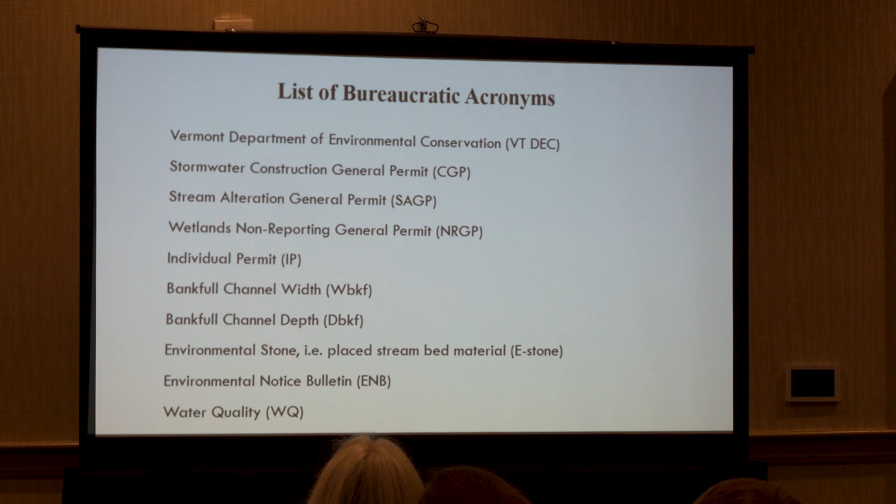Acronyms, gotta have them, okay? A couple of these, they'll be in the slides. I don't always point them out. So there they are: Vermont DEC, Construction General Permit, Stream Alteration, SAGP, that's a lot. Comes up a lot. Wetlands Non-Reporting General Permit. IP is gonna come up, Individual Permit. And a lot of you know Bankfull Channel Width, Bankfull Channel Depth.

E-Stone, Environmental Stone. And I have to say, I worked for the state for 12 years, and probably 6 years into being a river management engineer, I finally was told that the E of E-Stone was environmental stone. I didn't know that, so just want to point that out. ENB, Environmental Notice Bulletin, and then WQ, Water Quality.

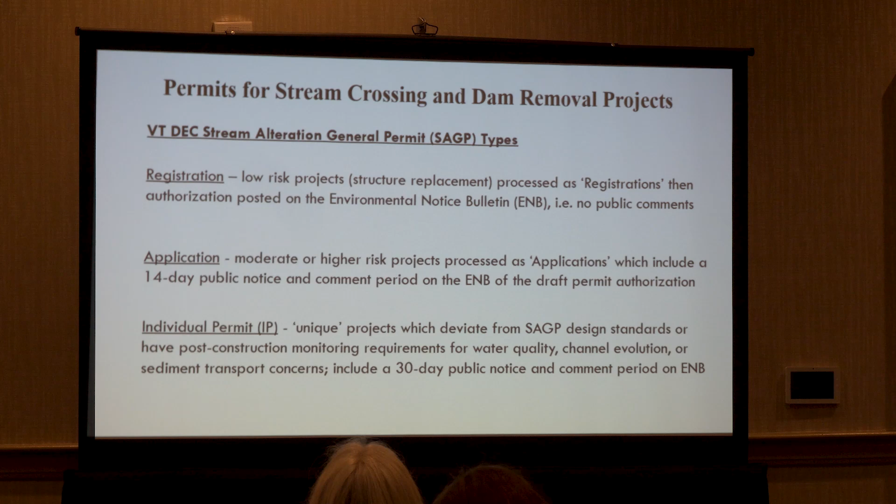So, stream alteration permitting. Couple of different pathways for your projects, depending on the complexity. So you have stream crossings, and you have dam removal projects. Most stream crossings are going to be a registration, which is basically a low-risk project that meets the standards, gets posted to the Environmental Notice Bulletin, and there's no public comment, right? It's something that we do on a regular basis. There's really not a high risk to it.

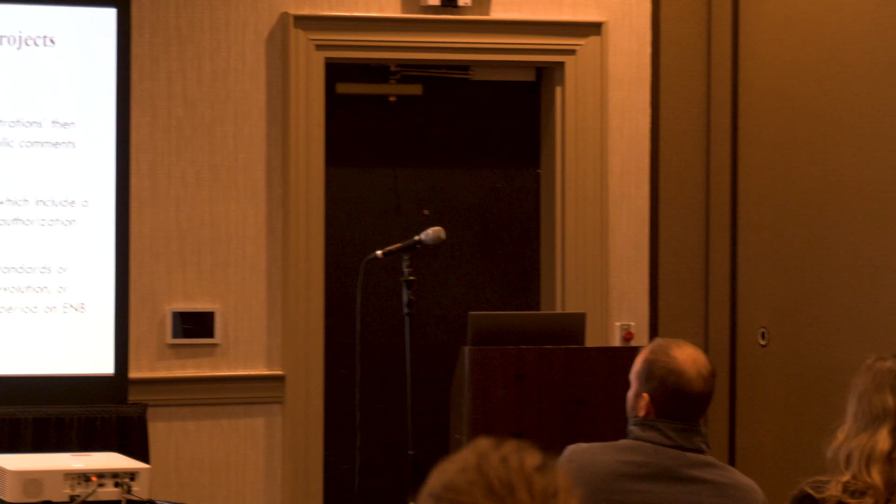Most dam removal projects are going to be in the second category, the application. So what that does is basically puts it on public notice, because we're often dealing with multiple landowners and larger amounts of disturbance compared to like a culvert replacement project. So that goes to the Environmental Notice Bulletin as a draft permit. You get 14-day public notice period. We rarely get public comments on stream alteration permits. If we do, we need to address them.

And then the last one, which is very unique projects, or projects where there is post-construction monitoring requirements related to water quality, sediment transport concerns, or channel evolution issues. That's an individual permit process. I do not like individual permits. It basically takes what I would normally give out, which is a 1-page authorization for a project, and has a lot of legal language. It's basically like a 5-page permit that we issue, and it's got all of these references. It's a pain in the butt. But we actually do it every once in a while, and that has a 30-day public notice period.

So water quality monitoring for stream alteration projects. These are standard conditions in the stream alteration general permit. So basically, you need to minimize turbidity and have minimal discharge of sediment during construction. And you need to isolate your work area, have appropriate sediment controls to the maximum extent practicable, okay?

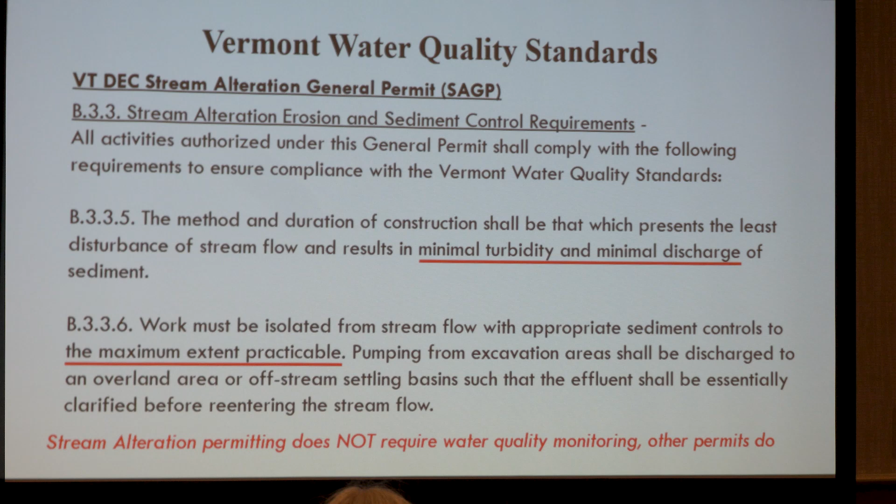Sorry, other permits might. If you have a stormwater permit for your area of disturbance, then you have to do monitoring during and after rainfall events. So a couple of other standard conditions. Just mentioned it, you gotta comply with your stormwater permit.

Common sense stuff. Your equipment can't be leaking fluid. You can't have hydraulic fluid dripping off. You can't have fuel dripping. If you're dealing with concrete, and this is more for culvert replacement projects where you're doing like concrete head walls, or concrete wing walls, or putting together precast concrete structures, you can't have that uncured concrete get discharged to the water course. Common sense stuff.

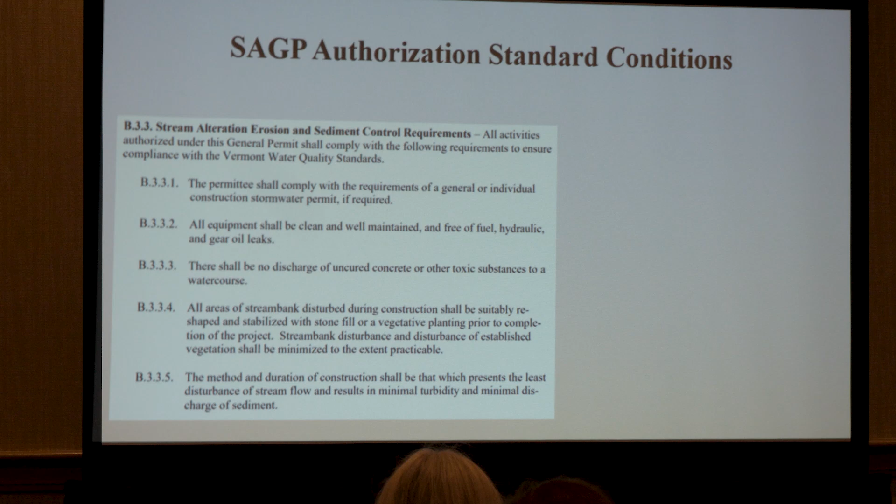So things to focus on is that all the stream alteration activities require submitting a water control plan. How is the contractor going to deal with stream flows? And this is actually a more recent update to the stream alteration permit. Prior to 2022, that wasn't in the actual permit. So we've changed that recently.

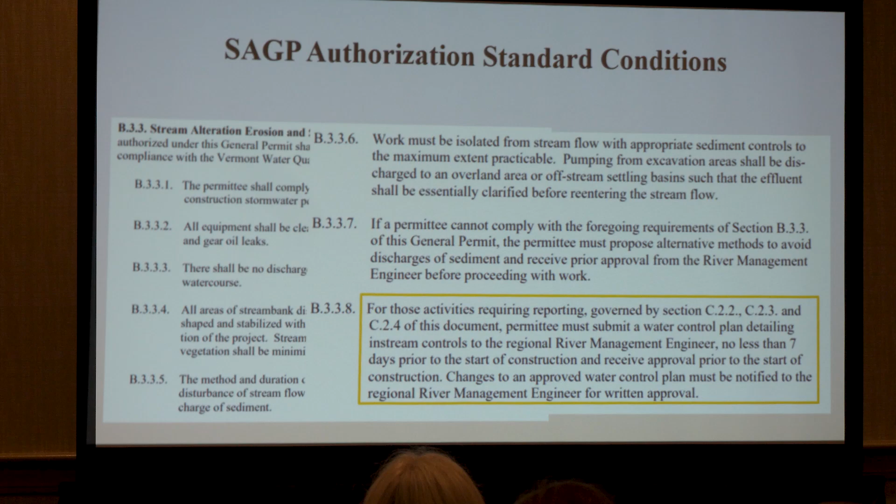We have a list of other changes we're going to do the next time we revise the permit. And really what that comes down to is that the river management engineers are figuring out, okay, this is a problem that keeps on coming up on different sites. How do we address it? We address it by amending the actual permit.

Phasing and sequencing plans. I don't like seeing a ton of effort go into these when the permit documents get submitted, when the design plans get submitted, because it's an engineer figuring out how the site should be phased and sequenced versus the contractor who actually does the work. So as an engineer, you're gonna look at things differently, just like I would as a regulator, of how things should be done, but the group that knows how to do it is the contractor.

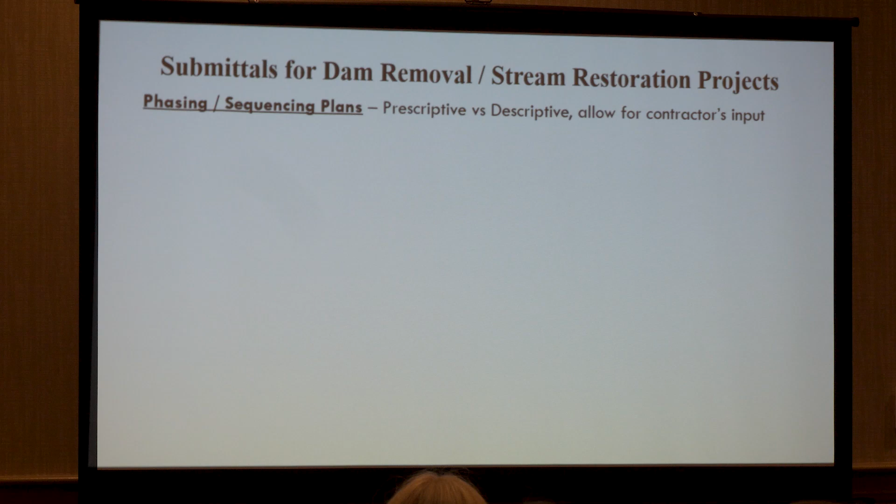So you can have goals, you have a project work window, you have in-stream work dates, stuff like that. You may want to avoid certain areas of a site. That can all be on the plans, but having it very detailed and then putting it out to bid often drives up bid costs because you're telling the contractor means and method. You're telling them how to do it.

So this was from Pelletier Dam in Castleton, and they basically just had a nice phasing plan. And when we get into that case study, I'll explain how it kind of all went out the window. This, dewatering and flow controls. This is required. Again, this can be illustrative, descriptive, but it needs to be sufficient detail to communicate the control methods the contractor wants to do. And again, I prefer these coming from the contractor versus the engineer.

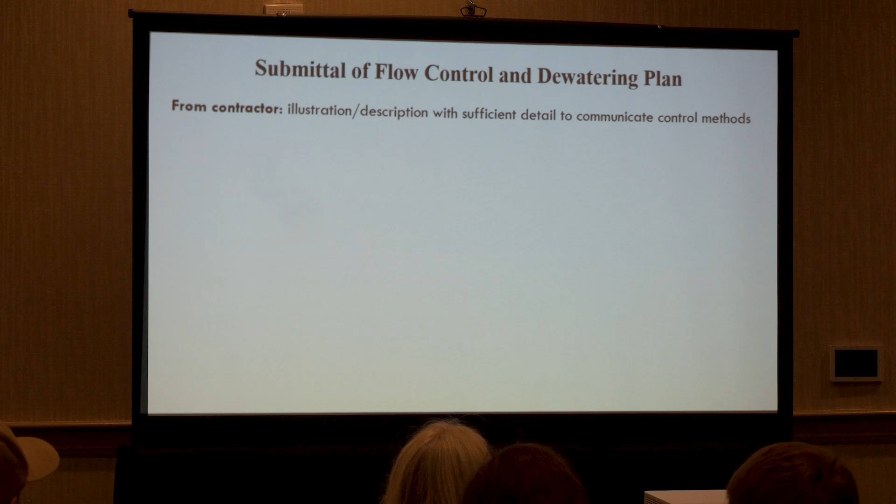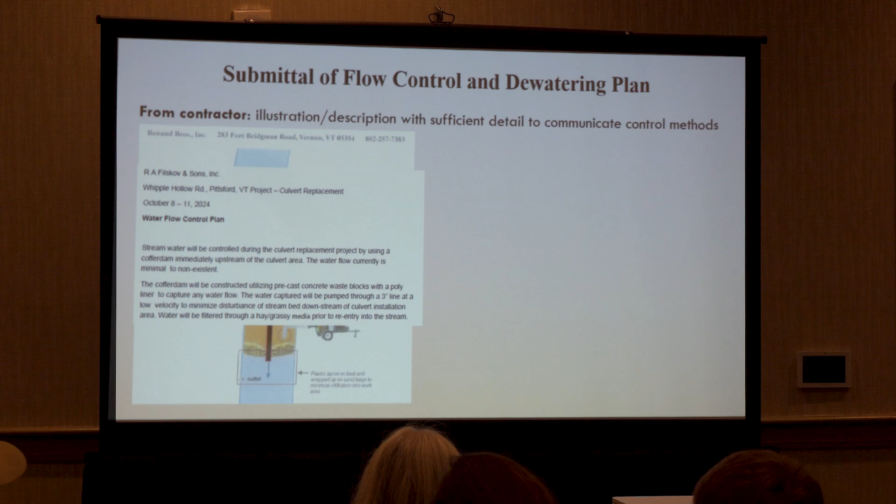You can have something on the plans, again, for the contractor to get an idea about what to do. But ultimately, at the pre-con meeting, I'm going to ask the contractor, what do you want to do? So you can get really creative and have nice drawings. It can be a written description. And written descriptions provide a ton of information because if the contractor's writing it out, they're going through, this is where this size pump is going to go. This is where I'm putting sandbags. It doesn't necessarily need to be an engineered plan.

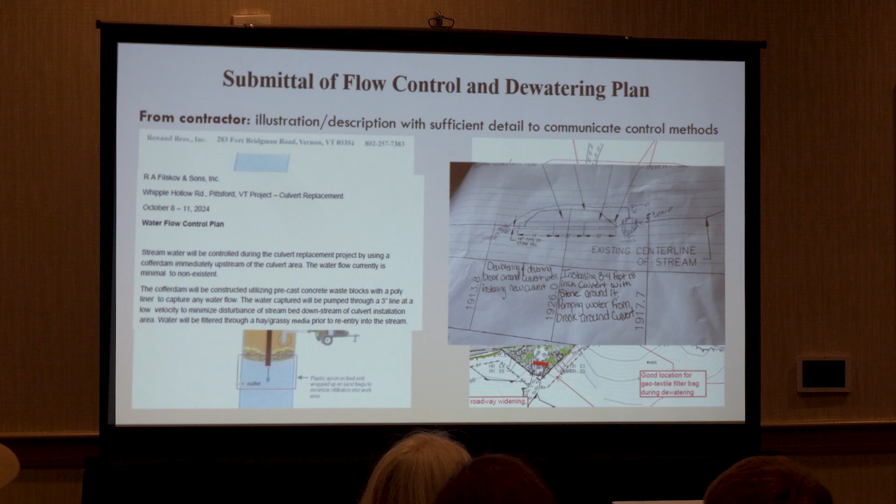It can be. This is actually from a VTrans project. VTrans requires that type of submittal where they get really detailed on their erosion sediment control and their stream flow controls. But there's a lot of information on there. Either method works. It can be a contractor handwriting notes on the design plans, taking a photo and sending it to me. I've got a lot of ability to approve different types of control methods.

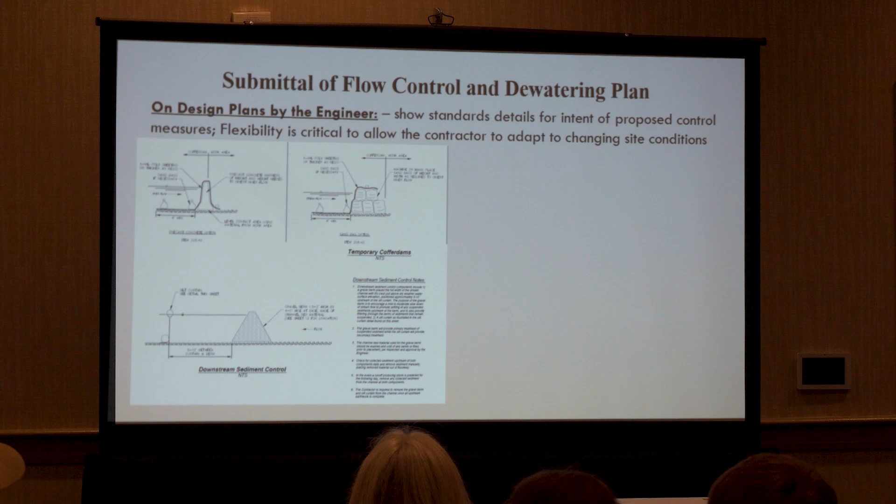So when you get into dictating how different practices occur and what needs to be done, again, it starts to drive up project costs. So again, I like to defer to the contractor.

This comes up quite a bit, doing precast, what are these called? The traffic control? Jersey barriers, thank you. Jersey barriers along a stream, parallel to flows to isolate the work area, and then lining it with plastic. That really sucks, to be honest.

Streams are not flat, so having a fixed concrete structure set on an uneven stream bed, you get a ton of leakage, and it's a ton of effort for the contractor to do. Sandbags, especially the yard bags, the big 3x3x3 ones, they're very good for that. But again, having the contractor figure out what they want to do is really critical.

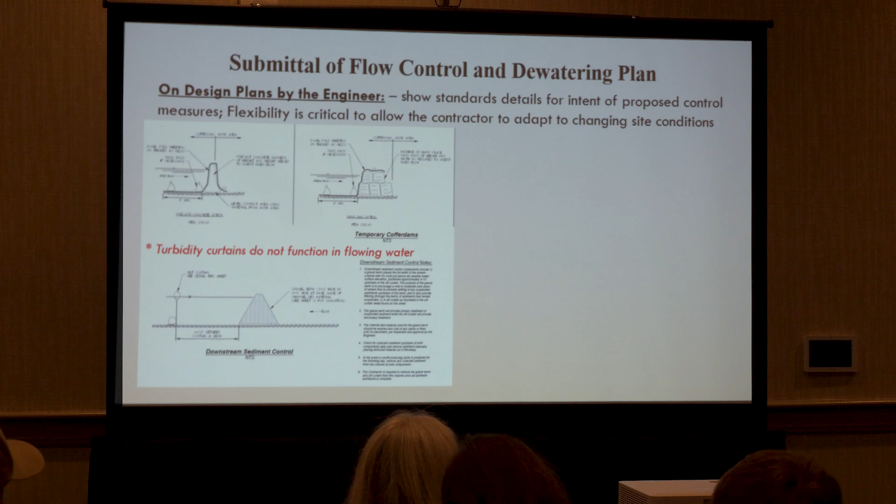Quick note. This flows from right to left, right? They've got an in-stream sediment trap, and we've got turbidity curtain going across the channel. Everybody knows what turbidity curtain is? The floating black curtain that's got foam on top to have it float on top of the water and then a weight on the bottom. That doesn't work when you're going across the channel. It doesn't prevent sediment from leaving.

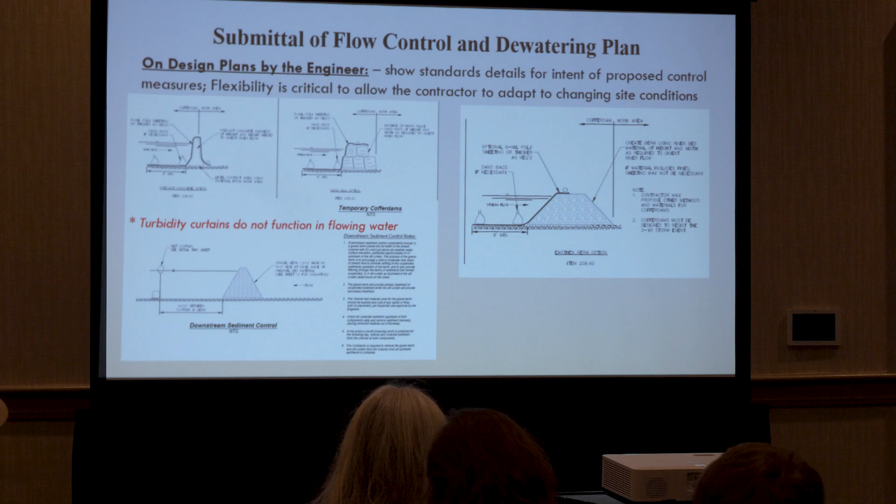It's really made to either parallel an active bank restoration project or still water, ponds, wetland settings, or lake settings. That's when turbidity curtain works best. In-stream check dams made of stone are good for collecting some sediment if you're having flowing water come right into them. And here's another detail that showed the actual in-stream material being bermed up in order to create a diversion to keep the flow area isolated.

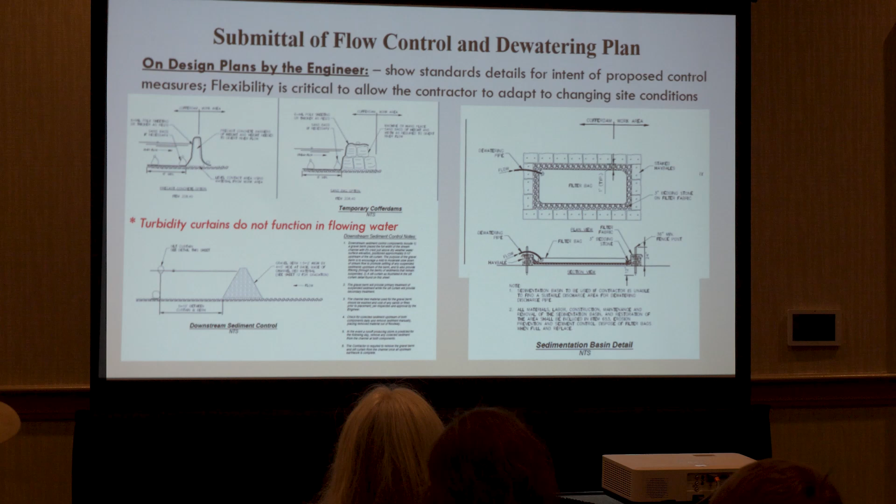And then if you have to actually do dewatering, you're pumping water, it needs to be filtered. That can be through a geotextile bag, that can be through a containment area, that can be over land, it can be through a vegetated area if there's sufficient length so it doesn't get back into the stream or into a surface water right away.

And what this looks like in the field is, here's a sump, so it's basically an excavated pit where they put in a perforated plastic pipe, they cut holes in that pipe, surrounded it by stone, and now they're pumping from that. So that helps lower the groundwater level within the site and also catches leakage or anything that seeps from any diversion into the site.

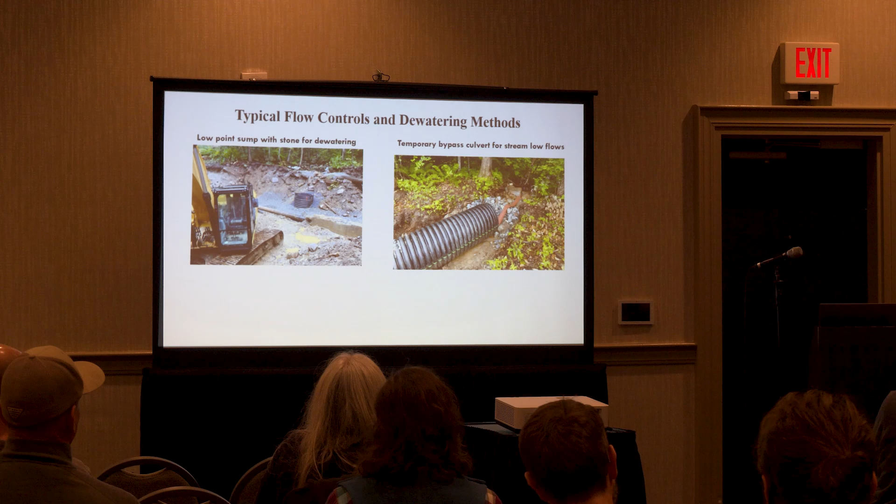Temporary bypasses, the actual culverts, are great. We don't have a sizing requirement for how big that pipe needs to be during construction. So you can picture you're going to be out at the site during the driest period, which is wonderful, and it's going to rain at some point. So you need to account for overflows. If you have a 3-foot plastic pipe that can handle the base flows, when it gets a lot of rain, how is that pipe going to handle the flood flows, and where's the water going to go? It's something to think about.

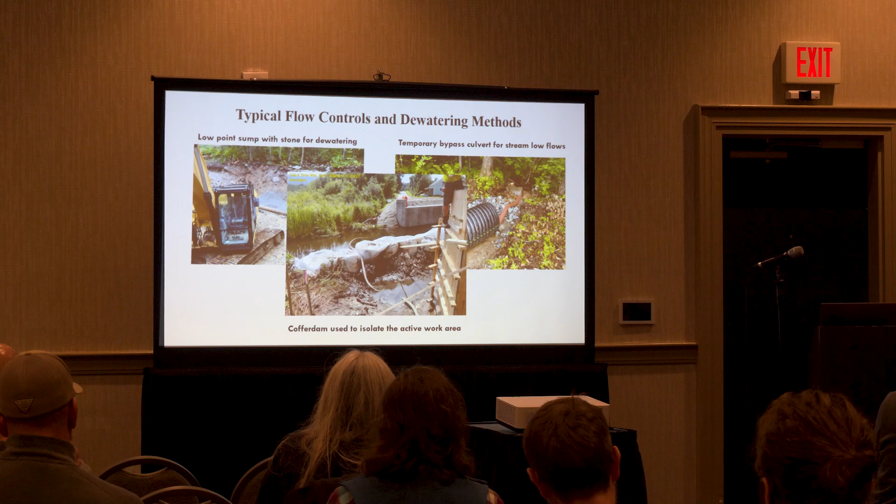And again, the cofferdams, the yard bags, lining those along the bank where you're doing work helps isolate the work area. So this was a project in the town of Bennington. They were working on bridge abutments, and they basically put yard bags in the middle of the channel, lined poly on one side, excavated out, did the abutment, rebuilt it, and then flipped the upstream end of the cofferdam to divert flows back to where they were working. So they didn't have to move those center yard bags. They left the middle ones where they were and just flipped where the water went.

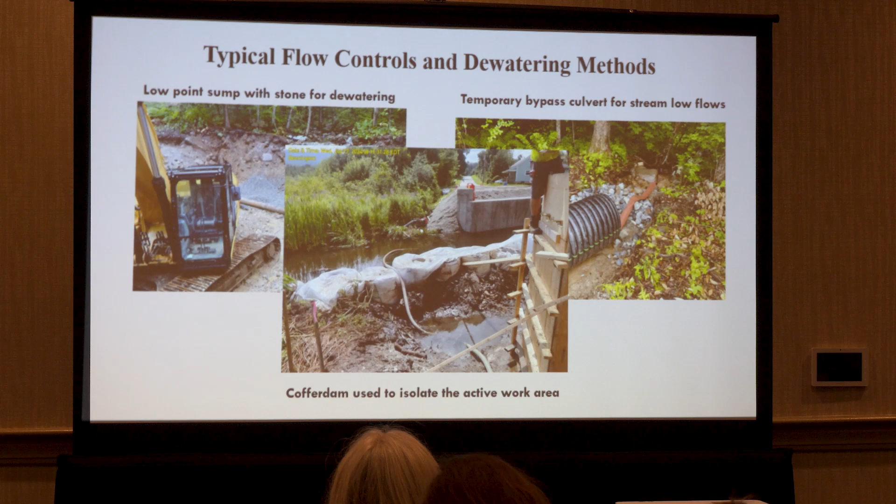So bed restoration with E-stone. If you're lucky. Josh, you're okay if I interrupt for a second?

Yeah, go ahead. Just during the dewatering thing, the fish division's going to also ask that you don't create a barrier and you maintain flow in the channel, so you're not just pumping around. Yeah. So yes, and no. If you look at the conditions of our stream alteration permit, you're trying to minimize impacts to that stream. So you can't dewater 100 feet of stream when your culvert project is 30 feet in length, right? So yes. But you do have the ability to impact fish migration during the active construction unless the project's multi-year.

Sure. Okay. Just want to make sure that that... Yeah, we can get into the details of that if we have time at the end, for sure.

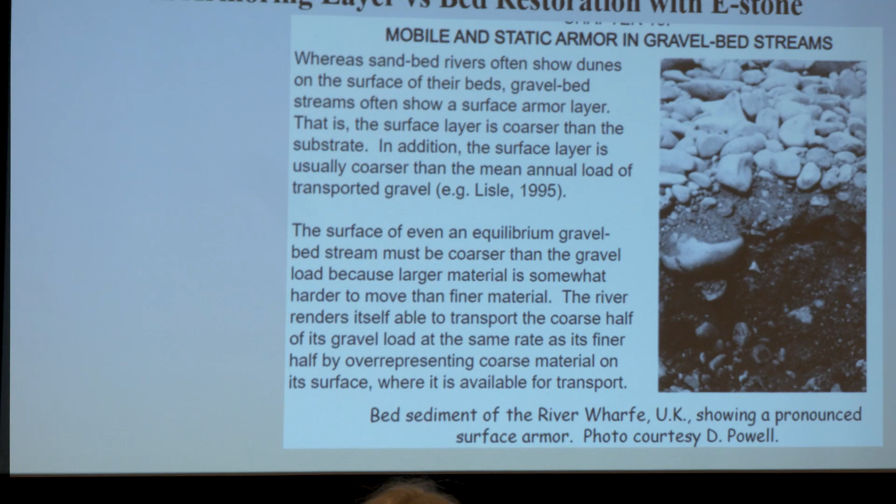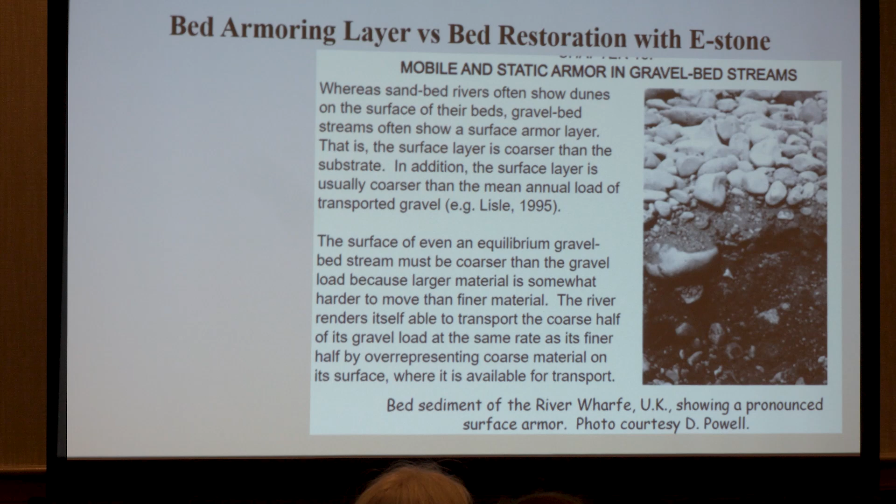So bed restoration, if you're lucky, when you do a dam removal, you're digging down to that armoring layer, that hardened layer of the original stream channel that's existed there maybe prior to the dam being constructed. And then you're kind of just building up from there. And this may come up during geotechnical borings and probings that you do, but sometimes during construction it pops up in different locations because you can't do geotech investigations throughout the entire impoundment.

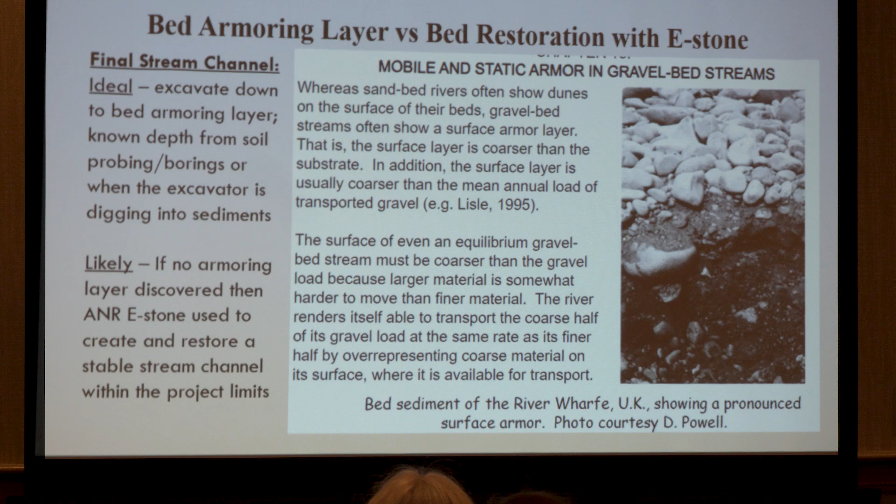So again, ideally your final stream channel would be that bed armoring layer. If not, then it needs to be restored with what we call E-stone, that environmental stone. And I'll get into the details about that. But that's basically, again, recreating a stream channel.

So the gradation of E-stone, it can either be a custom mixture of salvaged bed material that may or may not need to be supplemented with larger material, or often it's going to be an unprocessed bank run gravel that has quarry stone amended to it. So it's not something you can go to a quarry and say, I need E-stone. It's really always going to be a custom mixture.

We do have categories, so E1, E2, E3, E4. They have different velocities that they're capable of withstanding, different embedment, different Manning's n numbers when you get into modeling. So basically what we require for culvert projects is that you're sizing the E-stone, so the bed material that goes into the culvert, to at least the Q50. So the 50-year flood event, what velocities you get, that's going to be your E-stone. If it's under 9 feet per second, then you can use E1.

So we do have a descriptive specification. So E1 is going to be at least 18 inches for the longest dimension. The D50, the 50% volume, shall have at least a dimension of 12 inches. And 25% sands and gravels, under 2 inches.

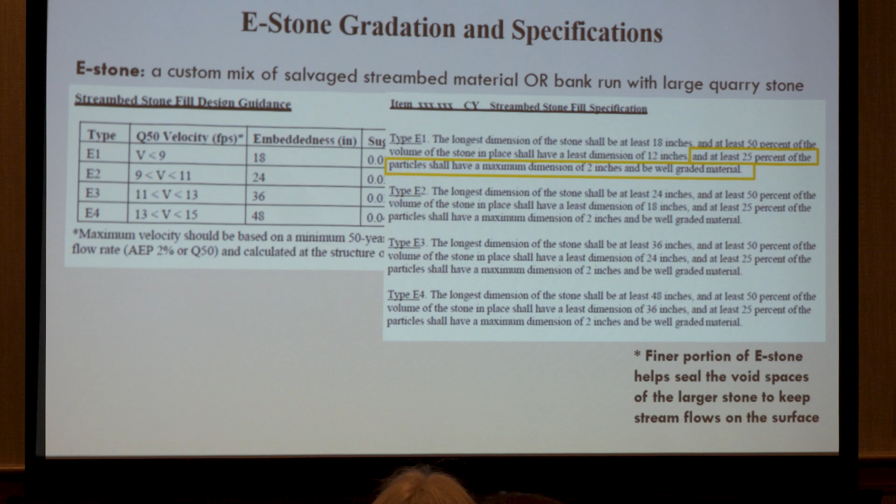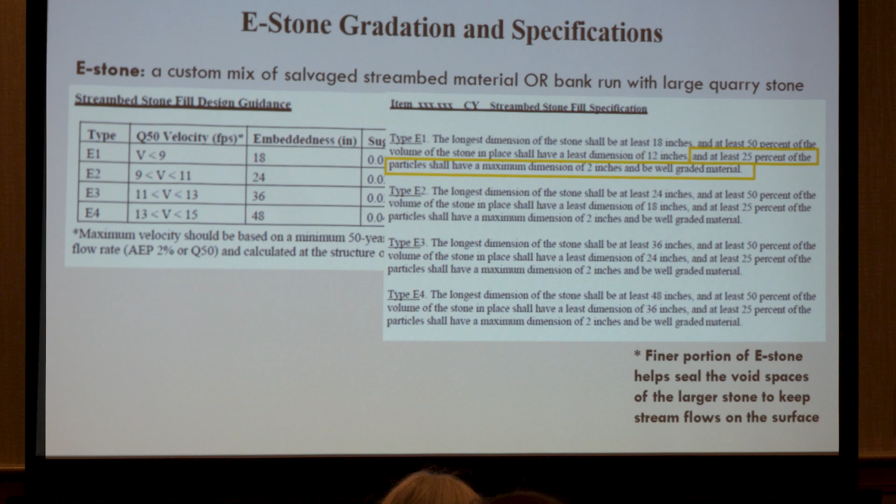So that fine portion is really important because it's not stone fill like VTrans stone fill you're putting into the stream bed or into your structure. It's stream bed material. So you have to have bony stuff that stays, you have to have medium stuff to fill in the voids, and you have to have fines that help seal the E-stone or the bed armoring that you do so that water doesn't go subsurface.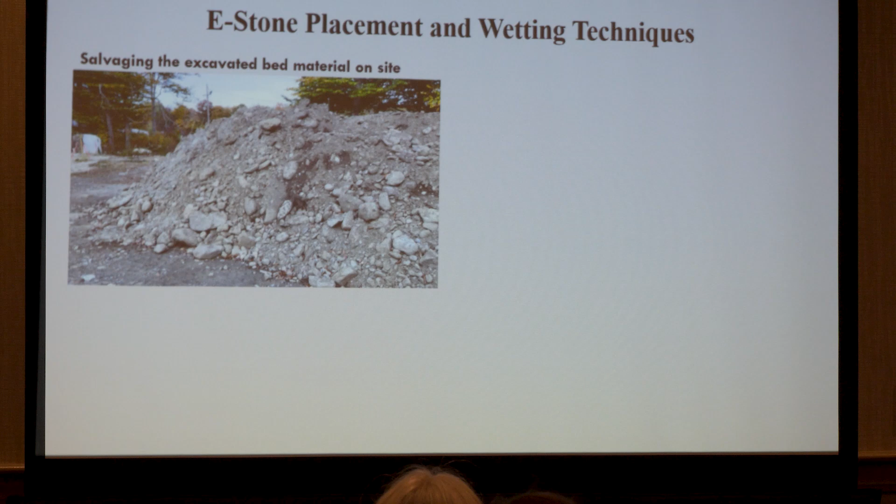A couple other notes through there. I'll go through this really quick. So this is salvaging some bed material. They excavated out underneath the original culvert. It was appropriately sized, and then they basically put that material back in.

And interesting with closed bottom structures, because we have those sediment retention baffles in them, whether it's metal for a metal structure or precast concrete has concrete ones, those are hard to get over the top of with equipment. So often the contractor is putting in a level area that may be just the stream bed material, but then it gets smoothed out from tracking back and forth in order to fill that structure.

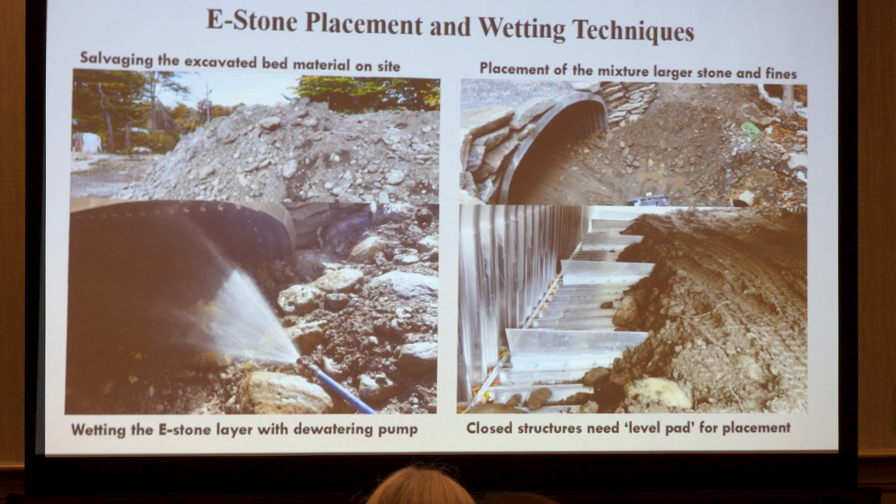Wetting down is really important. So it's often taking your dewatering pump, hosing it down to make sure that you settle all those fines. Or it could be soaking the structure so that you actually backwater and pond water into the structure and then turn on your pump the next day, draw the water down, and you're sucking all the fine material into the void spaces. And ultimately what we're looking for is that natural stream bed.

Okay, so that's it for me. Want me to open yours? You want to go ahead? See if I can do this right. Questions for me while we're waiting for Zap?

Great. You'll notice a big difference between Josh's presentation and mine. I tend to have a lot of photos and visuals because that's who I am.

So managing sediment on construction sites, and I'm going to be looking at it through the lens of the wetland program. As I mentioned before, I'm from the wetland program, and when you're talking about culvert replacements, bridge replacements, or dam removal projects, often wetlands may be at your site, one side or the other, or in proximity to, because wetlands along streams have a jurisdictional buffer.

So to make sure that we're all on the same page initially, what is a wetland in Vermont? So this is the legal terms. Basically it means if you have surface water or soil inundation for about 2 weeks out of the growing season, you've got a wetland on site. And when you're adjacent to any lake, pond, or reservoir, our jurisdiction actually extends out to about 6.5 feet deep, where there is a dominance of rooted vegetation. So yes, lily pads is rooted vegetation.

So wetland identification. When you're on site, you should be looking for 3 things. I don't expect you to become experts in wetland delineation. That's not your job. That's why you hire an environmental consultant. But there are 3 things that should raise red flags when you get on site as a contractor and you don't have a permit in hand. You should be asking the questions.

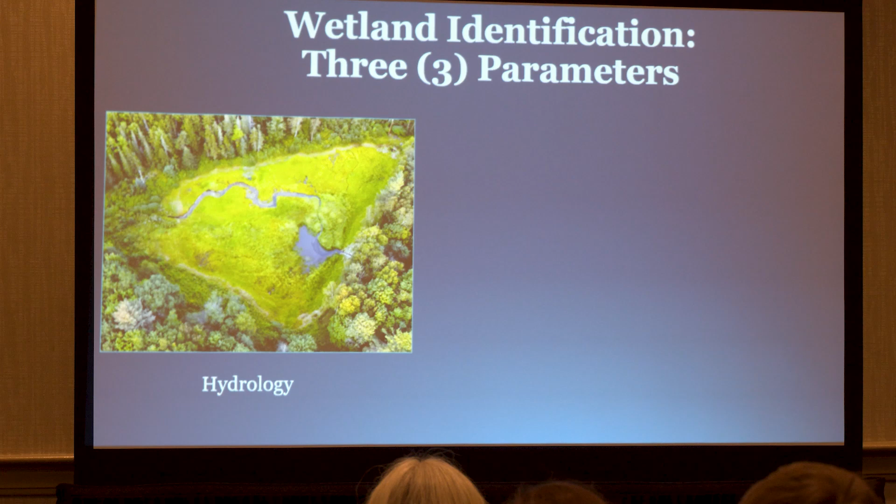First, do you have water? Well, if you already have a stream, the answer is yes. So then the question is, is the water there long enough, 2 weeks out of the growing season, to actually change your soils from upland soils, your warm brown colors? So think red, orange, yellow, brown, teddy bear brown, boring brown. There's not a lot going on in it. We call it soil, not dirt.

If you have water in your soil profile and it's there long enough, it's pushing the oxygen out of your soil profile. All soils have a certain amount of space in between soil particles. When you have the presence of water, it closes those spaces and decomposition happens in the absence of oxygen, changing your warm brown colors to your cool brown colors. That's when you're seeing your gray, green, blue browns, black browns. And if you start digging holes, what you may end up seeing is speckles of what looks like rust. That's actually what it is. It's oxidization.

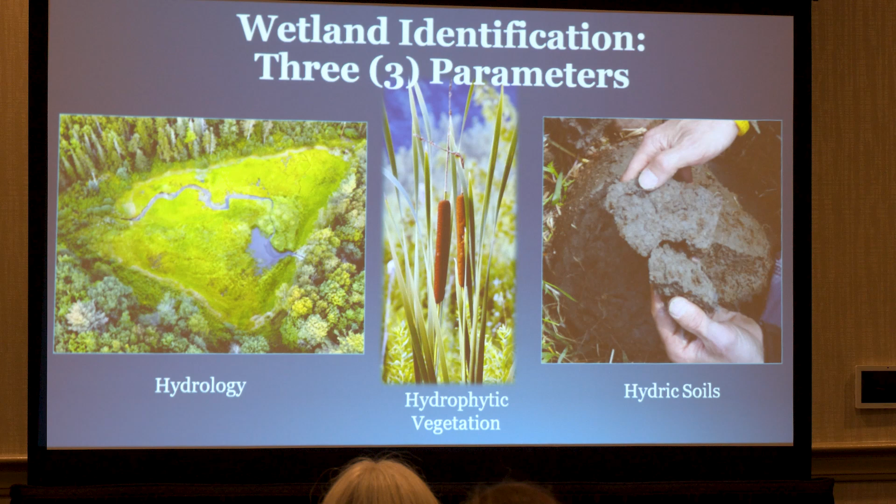If you have water, is it there long enough? We think so. We look at our soils, we say, yeah, they're in those cool brown colors. Then we start looking at our vegetation. When we have a dominance of vegetation that prefers wet roots, and you have all 3 parameters present, then you have a wetland. Do you need to know all species of vegetation? No. But I could give you maybe 20 species, like sensitive fern, that if you see on site, you should be asking questions.

Why does it matter? Because the state of Vermont has a wetland program, and wetlands are jurisdictional. If you are doing work within wetlands, class 2 wetlands, or their 50-foot buffers, and in some towns there are also class 1 wetlands with larger buffers such as Tinmouth and Dorset, etc., then when you are doing ground disturbance, removal of vegetation, etc., you may need a wetland permit.

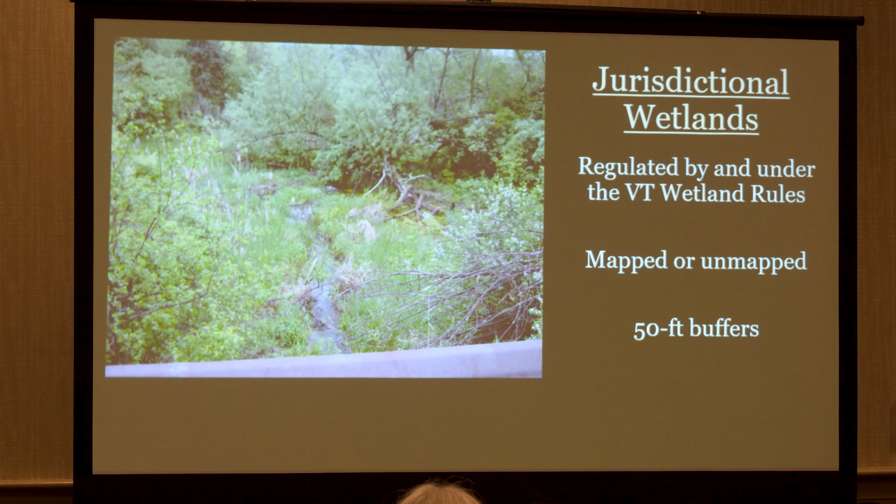So jurisdictional wetlands are regulated under the Vermont wetland rules. They could be mapped on the ANR Atlas or not. The absence of a mapped wetland does not mean that it is not jurisdictional. You may still require a permit. And those wetlands along our rivers and streams that are 2,500 square feet or larger are, by default, by law, class 2 wetlands, and therefore are afforded a 50-foot buffer.

Why does it matter? Because as Laura alluded to at the beginning in our keynote, there's a lot of functions and values that wetlands provide on the landscape. The state has identified these 10 specifically. And what I would like to draw your attention to for these projects: floodwater storage, water quality, fish habitat, erosion control, which also comes back to sediment management. I do have a way of bringing it back around.

So does your project need a wetland permit? And this is specifically for culverts, bridges, dam removals in this context. Are you doing an activity in a class 1 or class 2 wetland? And is your activity considered an allowed use or not? That means, are you doing any grading, filling, ditching, or dredging? Are you doing any type of removal of vegetation, such as tree cutting or conversion? And are you doing any type of construction of infrastructure, building, roads, buried utilities, culverts, head walls, etc.? If the answer is yes, then you should be asking whether or not you need a permit to proceed.

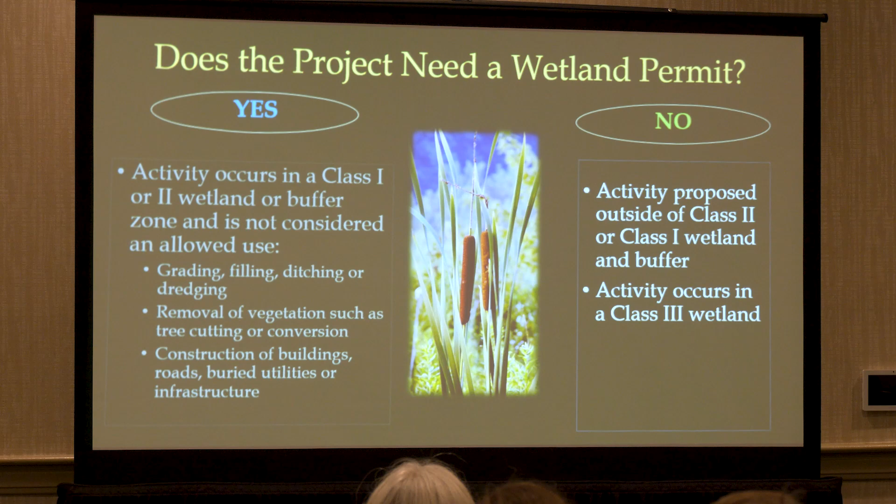If your activity is proposed outside of the wetland or its buffer, that's the key word, then you don't need a permit, green light. You might need other permits, such as a stream alteration permit, but not from me. And if the activity occurs in a Class 3 wetland, please do not take it upon yourself to determine if a wetland is a Class 2 or a Class 3 wetland. That is not your liability, because if you get it wrong, you end up in a violation. So contact your district ecologist.

We do desktop reviews. We drop ourselves on Street View. You can send us photos at the location, both upstream and downstream. We can look at vegetation. We do site visits. It's easy, so don't get caught in making those your own determinations.

And then if the activity qualifies as an allowed use, and that's important because culvert replacement projects could actually fall under an allowed use. I'm not going to take you down the rabbit hole of permitting because this is about sediment management during construction. But culvert replacements could be an allowed use. And most dam removal projects are also allowed uses with an approved plan that has been submitted and reviewed by the wetland program.

So, impact considerations for both culverts and dams. Do you need temporary crossings? So getting back to access, do you need to do detour of local traffic? Do you have other additional impacts for utilities? You need to relocate a cable. Do you need additional stabilization techniques? Because if the answer is yes, you might need a wetland permit.

Where are your staging areas? Where will your vehicles be parked? Where is your dewatering equipment being set up? Where are you going to have areas of vegetation clearing? If the answer is here, here, here, and here, and there's wetlands nearby, you might need a wetland permit.

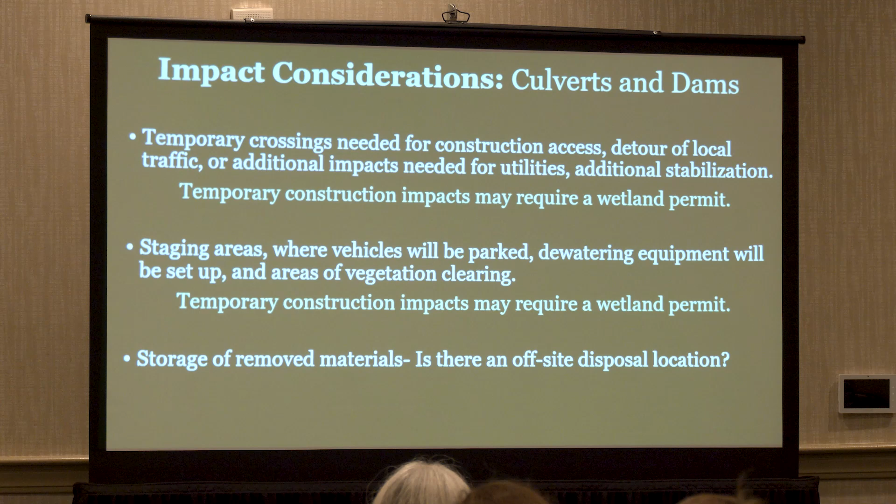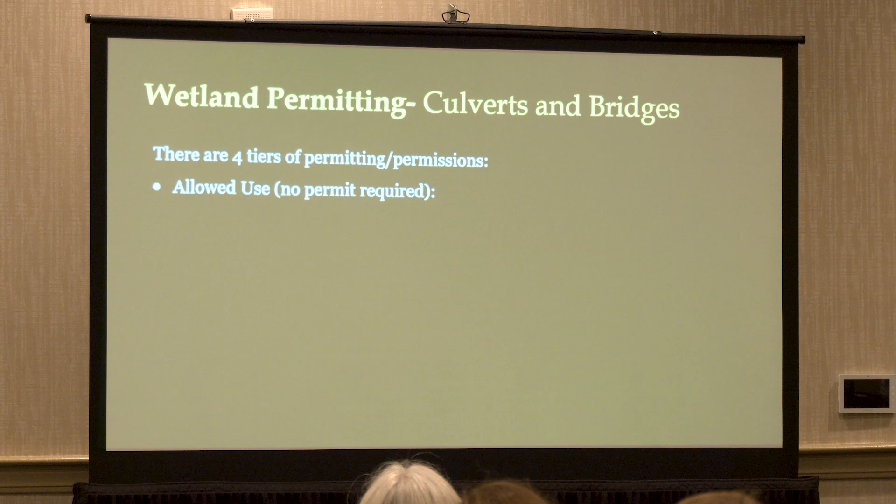So, evaluation. From a wetland permitting standpoint, there are basically 4 tiers of permitting or permissions. This is specifically for culverts and bridges. So first, is it allowed use? Meaning replacing in kind. It's a one-time 250 square feet of new impact. If it exceeds that, then does it qualify for a non-reporting general permit, the NRGP, which is a free permit with a registration, typically issued the same day that you submit your registration, so it reduces delay. There's specific thresholds that your project must meet in order to qualify for the NRGP. That's where I and other district ecologists can assist you.

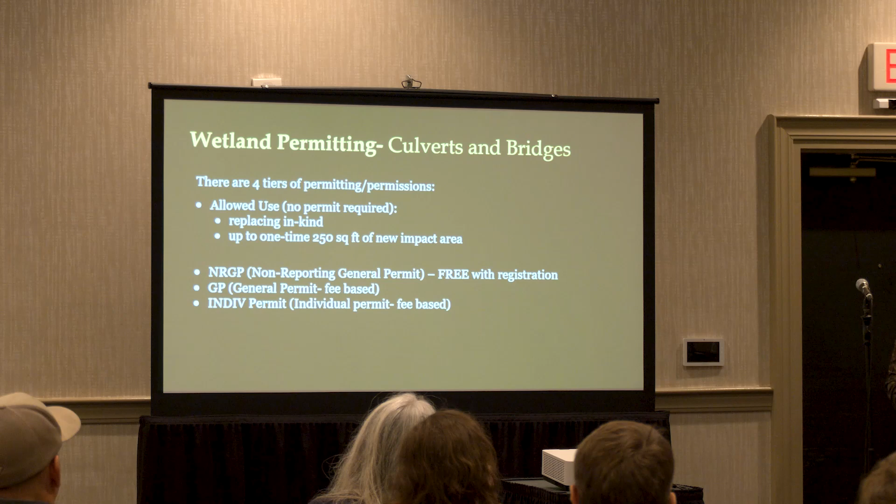If you exceed the thresholds for the free registration, then you're into the normal permitting. We also have the GP, general permit, and the individual permit, just like Josh. Both of those are fee-based, based on the square foot of impact to both wetlands and buffers. There's also public noticing periods that are mandatory. Plus you have to have the review by the district ecologist to draft the permit in order for it to be issued, and so quite quickly you may end up being anywhere between a month to 6 months before you can get your permit. You have to be able to plan accordingly.

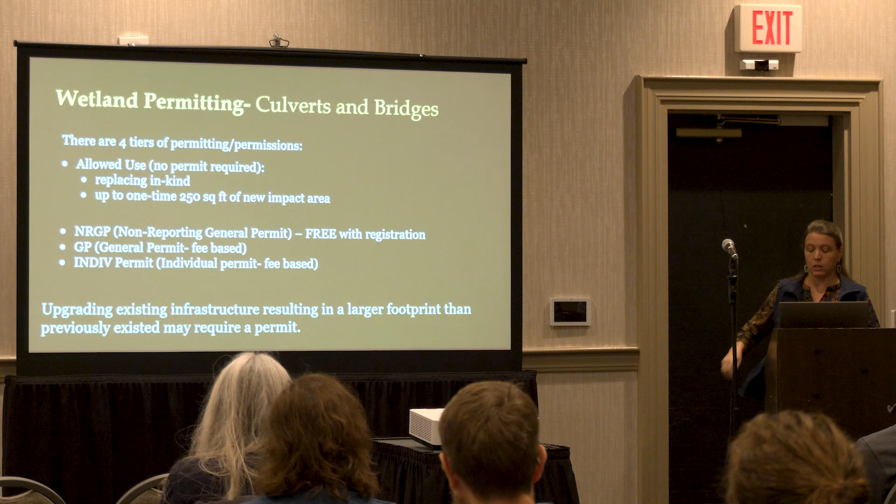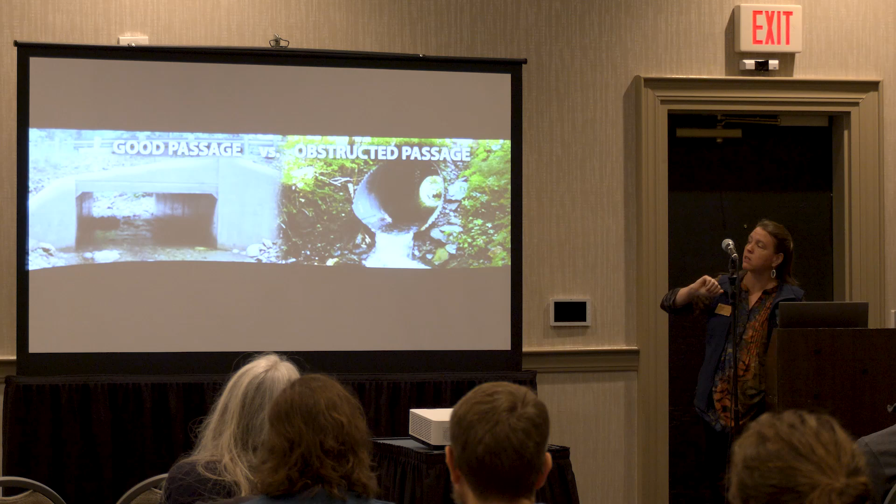So upgrading existing infrastructure, meaning if it's going to become larger than it is currently, then you may need a wetland permit. And so we should be reviewing that. This is just a cool visual, the obstructed passage to having a good passage. This would be a project type that would qualify for the NRGP because it's providing flood resiliency and aquatic organism passage. And they were able to meet the thresholds of impact to wetland and buffer by basically keeping the same footprint.

Dam removals. So everything I just talked about, you need to consider the same things for dam removals. Where is your access, where is your staging, where is your sediment disposal, and then how are you going to manage for your sediment?

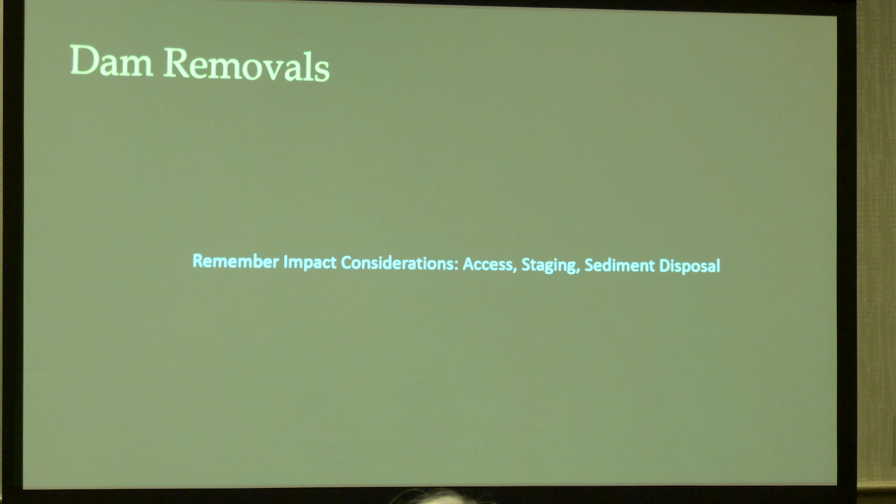And I should note, there is often years of work that takes place. If you remember Laura's slides where people just kept coming up on screen. Well, all of that takes time, and when it comes to wetlands, we really can only identify them during the growing season. Why? Because plants are dead and soils are frozen during the winter. So it takes years to get to a point of actually having a finalized design plan and implementation of those designs. So before the first bucket full of earth has taken place, there's been a lot of investment of time.

Your job is to follow the approved plan, because there have been so many people who have reviewed that plan to get it to the point of approval. So if you as a contractor are going to be making changes, they may be totally appropriate, but they still need to be communicated. And that's a big piece of the dam removals, is communication, communication, communication. Otherwise, you may end up with an unexpected outcome or violation. And we're going to get into case studies that are going to demonstrate that.

So dam removals, is it an allowed use? It is if it's an approved plan. Can you use timber mats? Colby was talking about that. The use of timber mats can be an allowed use, swamp mats, instead of having to clear a whole swath of vegetation. Where are your sediment disposals? Are they identified and have they been cleared? And if for some reason, aspects of this can't meet the allowed uses, then certain components of a project may require a wetland permit, even though the majority of the project itself is approved. And it's a case-by-case basis, coming back to communication and everyone that's been involved.

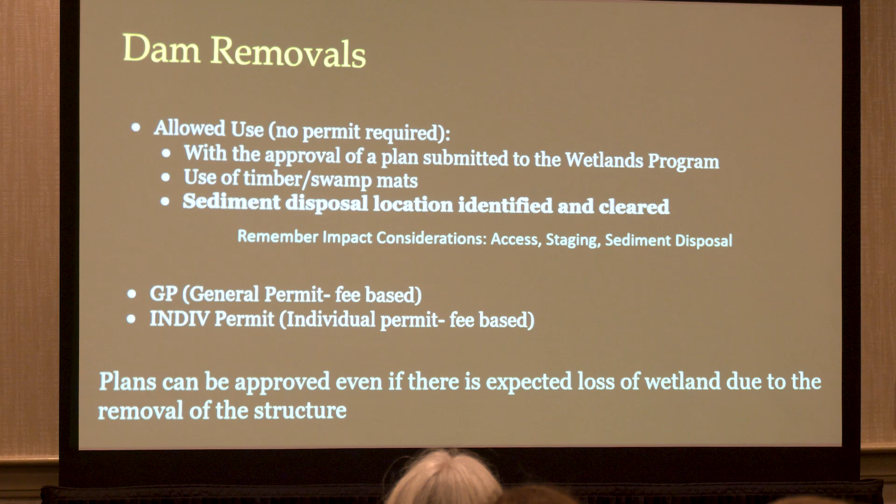So plans can be approved even if there is an expected loss of wetland due to the removal of a structure. And that's somewhat not intuitive, because I'm like, I want to protect all the wetlands. That's why we have a wetland program. But it's returning a system back to its natural hydrologic function. And that is restoration, which means that if there was wetland there due to the level of inundation because of a dam, then that wetland might not have ever been there before the dam was in place. So do we need to protect it? I would argue not. And we have projects that go both ways. A lot of dam removals actually result in a net gain of wetland and wetland restoration and connectivity to the floodplain.

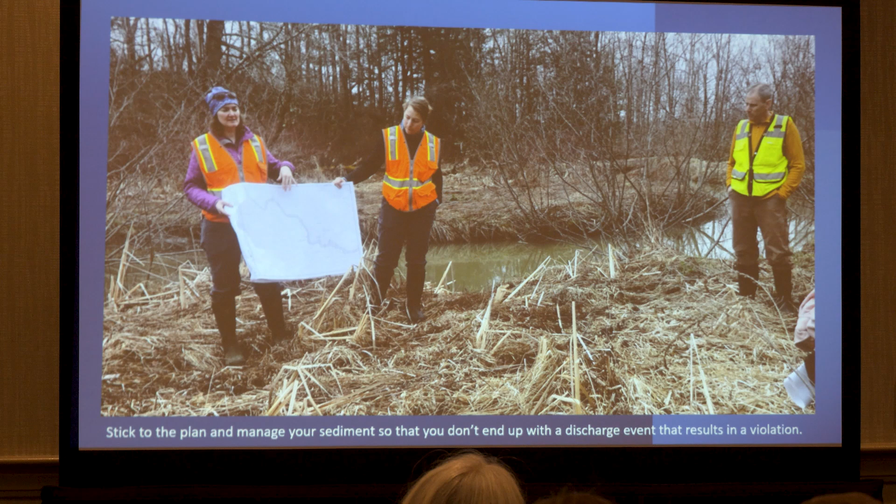So partnerships, yeah, look at you, aren't you cute? Partnerships, funding mechanisms, regulatory entities, Army Corps of Engineers, dam safety, floodplain managers, river program, wetland program. All of us influence a final design with an approved plan that may be connected to permitting or other conditions. So stick to that plan, and a lot of it comes down to management of sediment so that you don't end up with a discharge event that results in a violation.

So we're going to move into case studies, and I'm going to kick us off, and then Josh is going to supplement. And we have a contractor here today. He'll be introducing himself, Tom, who worked on one of these projects, and he's going to talk to you about his perspective and experience on a specific case study.

So, if you are bidding, and you went through this already, so I don't have to spend much time, you should be reviewing all of these factors. Access points, limits of disturbance, methods of dewatering, what are your E&S controls, where are your disposal locations, how are you managing invasive species, contaminants, what is your time frame, do you have a contingency?

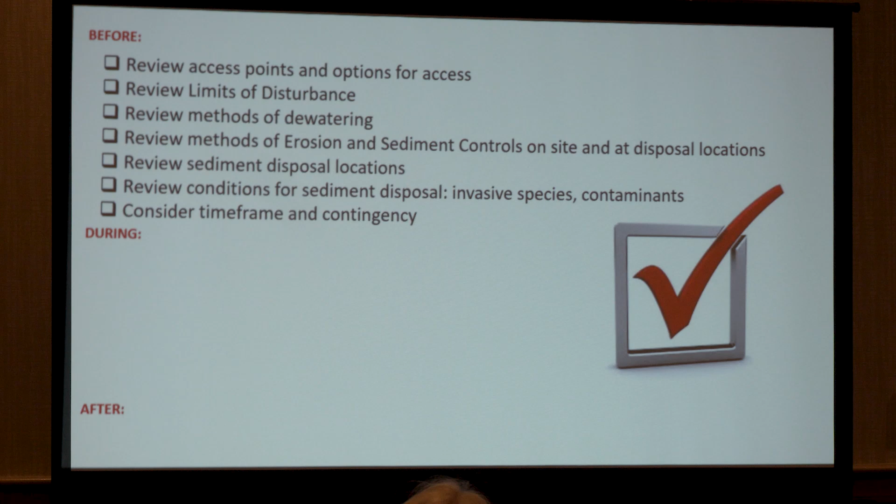During, maintaining your dewatering levels, how much of an open area do you have at one time, stabilize as you go. This comes back to sediment management, stabilize as you go. What is the weather forecast? Are you maintaining your E&S controls on site? Are you stabilizing your access? And are you identifying potentially emerging issues such as head cuts or areas of unexpected erosion?

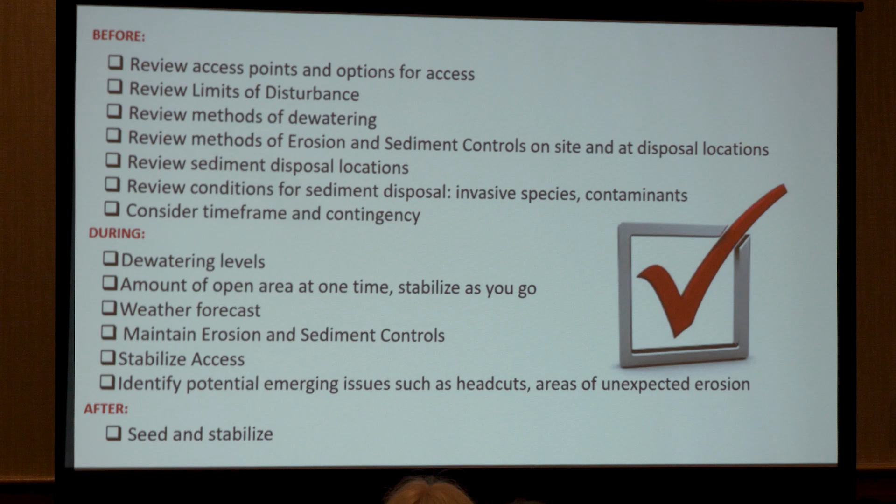We have an example of that. And then after, seed and stabilize. So what does that look like? The block of black is your sediment, and then underneath is the native material. This is one job, I won't tell you what it is. I've blocked out the contractors' names, but look, 225,000 up to 750,000, average was about 400,000.

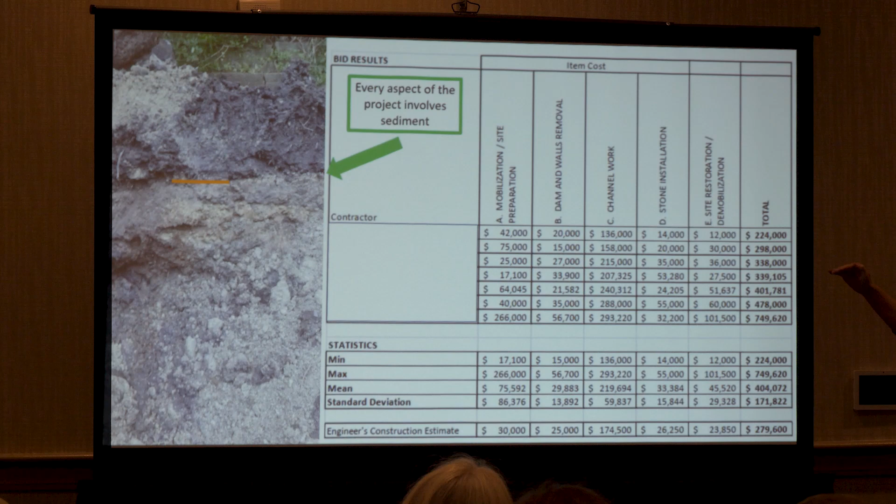As a contractor, when you're bidding, you need to be realistic. You need to understand the scope of work, and a lot of it comes down to sediment management. Why? Because every plan has one of these. Water control, erosion control, invasive species. And when you read through the construction sequence notes, it's all about submitting what? Your E&S plan, a pre-construction meeting, installing your E&S controls, waiting for appropriate conditions, maintenance of your controls over the course of the project. You may have some flexibility of what those methods and structures look like, but they need to be there and they need to be maintained.

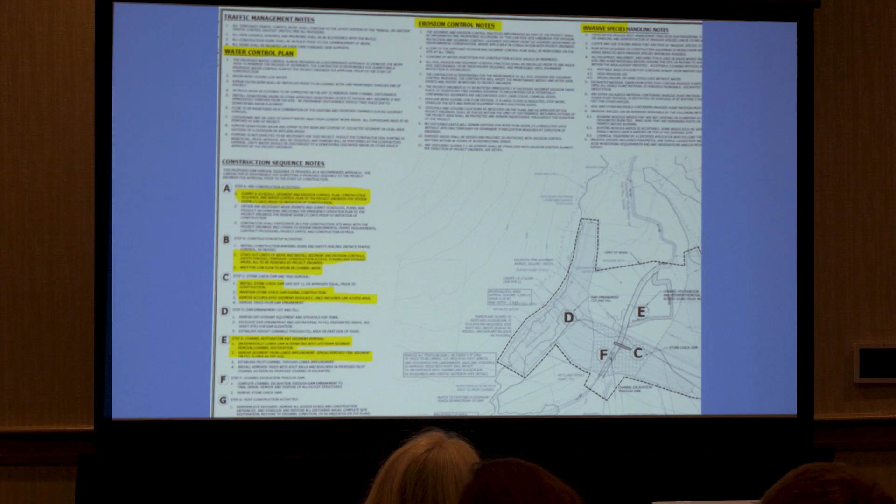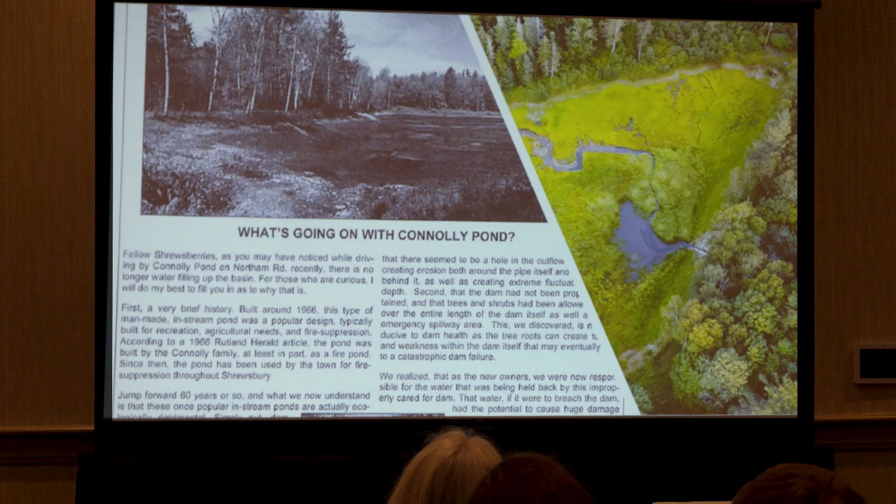So Connolly Pond, what's going on with Connolly Pond? This was one. And this project, we actually dewatered the season before the project was implemented. And what's unique about this one is, once again, we have the page and it's sediment removal. But not all sediments need to be moved off site. So some sediments actually got used on site to reshape areas of the land back to native grades where they had been originally cut and placed.

So 5 to keep talking, 10 for questions. We're going to go quickly.

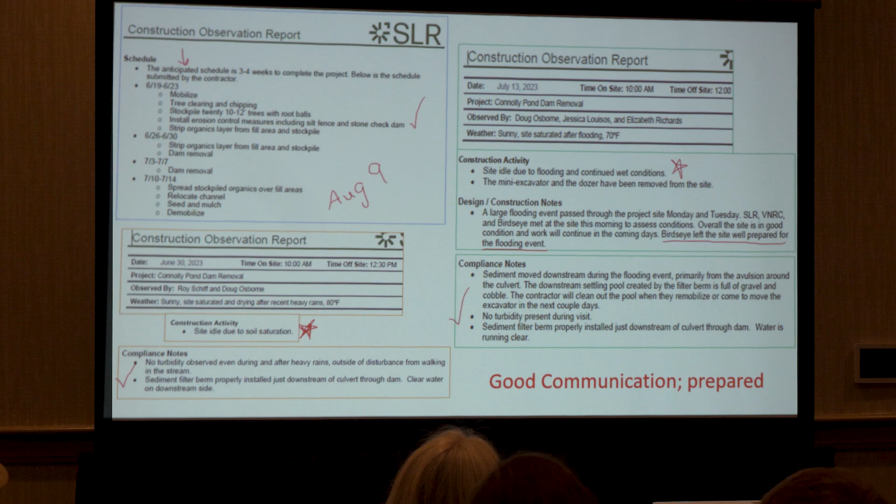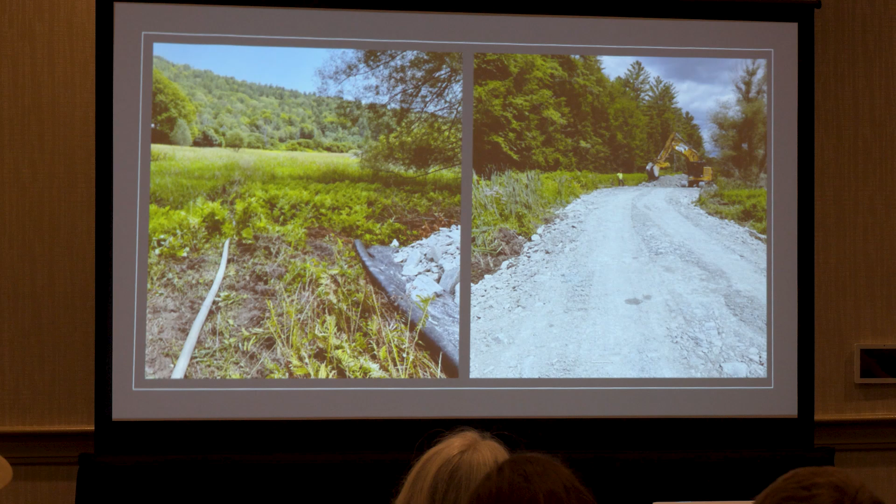Communication, and the timeline was we're going to end in July. The reality was in August, and I'm going to particularly call your attention to the red areas. Good communication and being prepared. Pre-construction meetings, huge. Josh alluded to that as well. Let's make sure that we're all on the same page. You can use a variety of techniques on site. Maybe you're only using one, maybe you're using a combination. The use of things like geotextile to create temporary access, firm travel surfaces, reducing excessive rutting and sediment discharges.

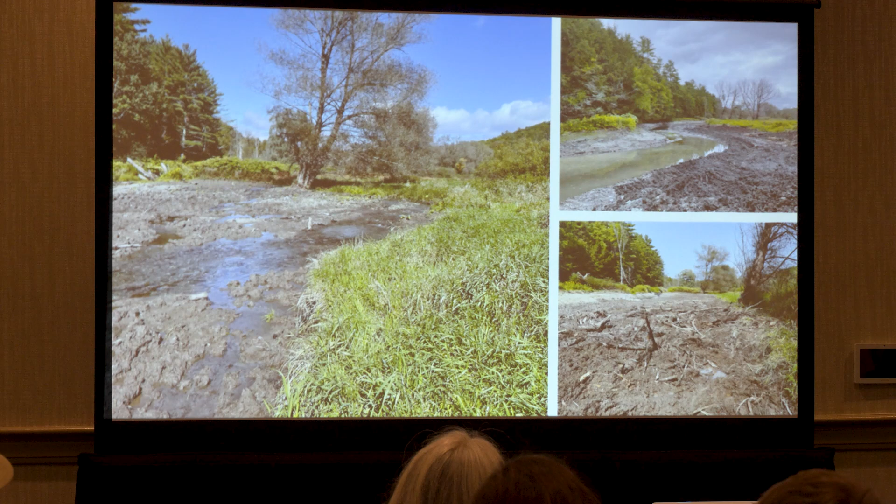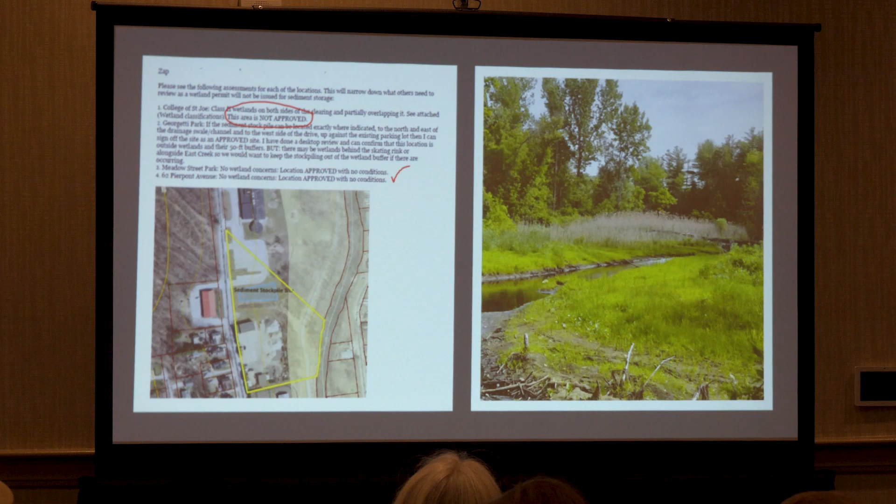Dunkley Dam in the middle of Rutland. Look how well that site is now stabilized. It required the removal of 11,000 cubic yards. And once again, considerations, you know, a lot of open area, a lot of sediment that needed to be removed. Oh, and a huge patch of Phragmites, so a non-native species, so the disposal locations were important right across the street. And if you'll notice, yes, you're responsible for sediment management of your disposal locations as well. In this case, you can see the erosion fence there.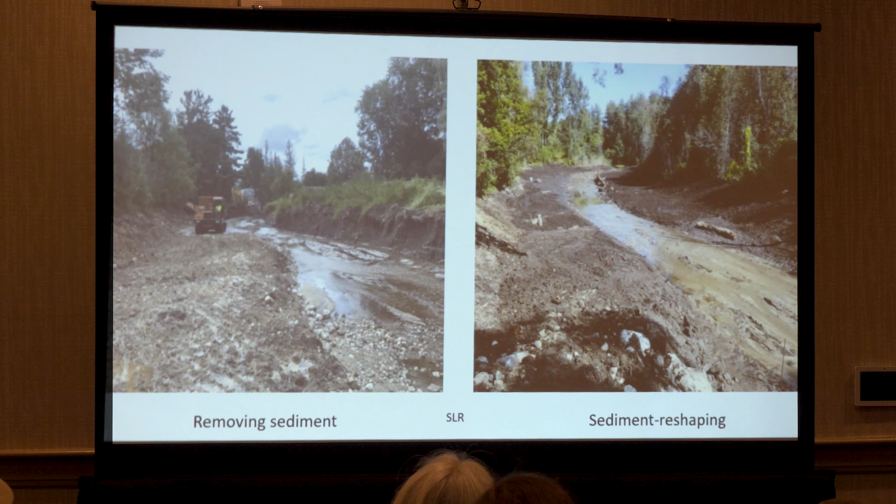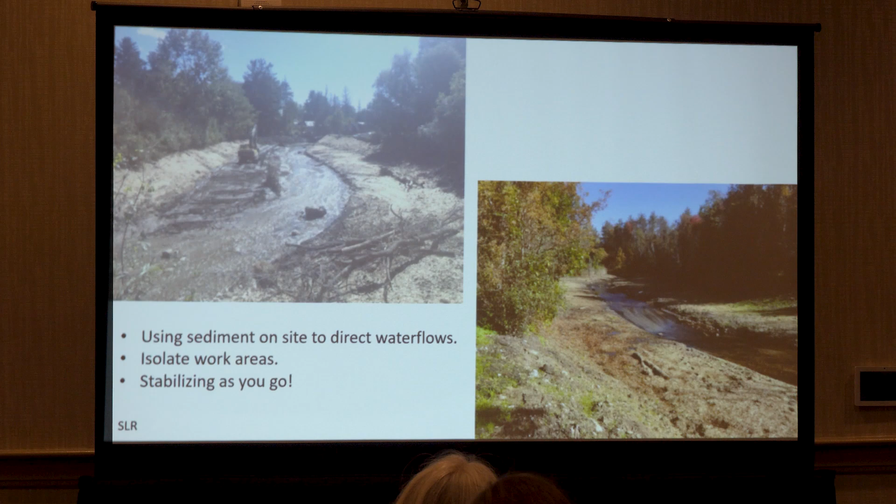And this just gives you a sense as to how big these sites are, how much open ground, and if huge storms start moving through, what that could end up looking like. So being prepared is really important, and stabilizing as you go is important. Using sediment to direct water flows, isolate your work areas, and then stabilize as you go. So that's what the finished product looked like. And once again, everything is about sediment and invasive species.

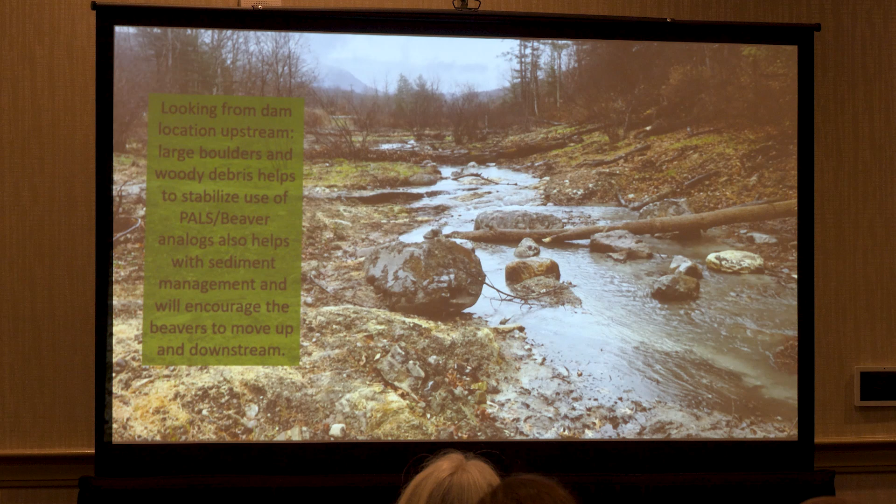So this is the one I'm going to invite Tom to come up and discuss. This is the Wainwright Dam, and we're standing at the dam looking up through the valley, but utilizing a variety of techniques in order to manage sediment on site. And with that, I'm just going to turn it over to you so that you can talk about Wainwright. Oh, before we talk about Wainwright, don't let this happen to you, okay?

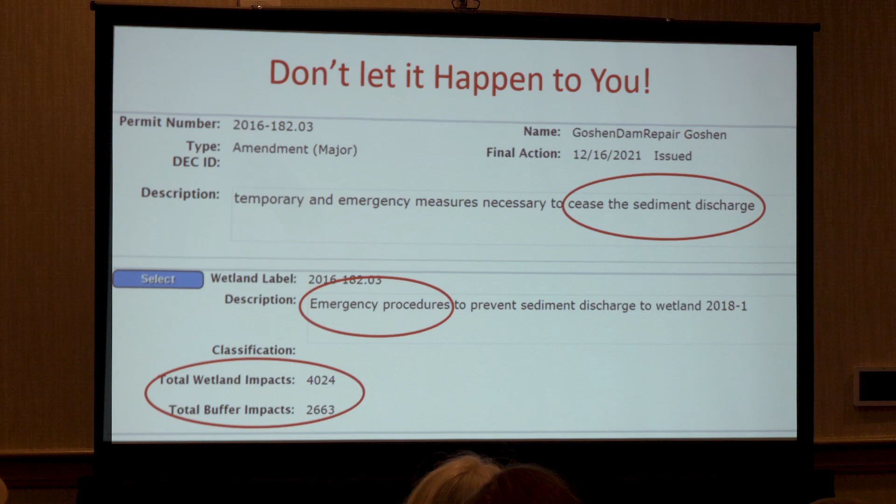Cease the sediment discharge, emergency procedures, extra impacts. This is Goshen Dam, known as Sugar Hill Reservoir. Let's just say they were not prepared. This ends up being what happened. We have to maintain water quality, you have to slow velocities, you have to remove accumulated sediment, you need temporary access. And yes, at the end of the day, you're going to get a $57,000 fine. You want to avoid that, and we're coming back to Wainwright, which went smoothly.

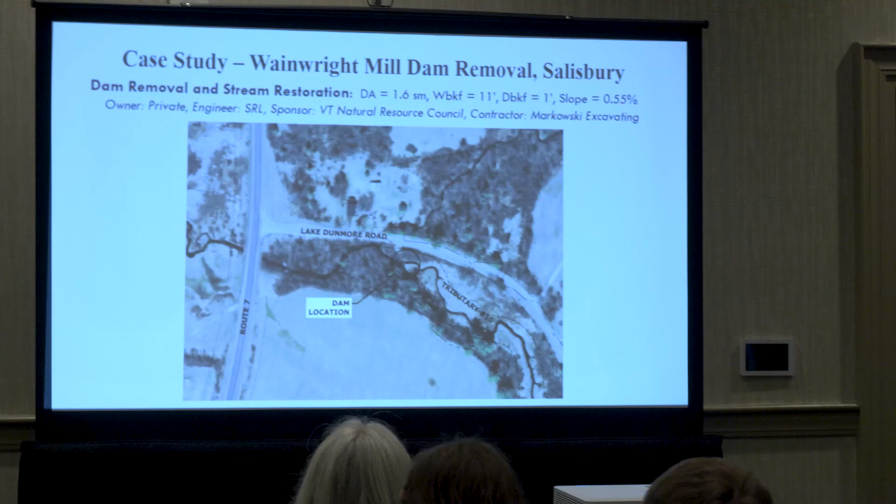The project was basically to take out a bunch of sediment from an old, I believe it was like a wood mill dam that had been in use or built in the 1800s. It finally reached its life cycle, and we ended up with the project.

As part of the submittal process, yes, we had to provide a sediment control plan, which when I received it, I said, well, this looks great on paper. This is what I think. I visited the site. I like it. We had an on-site meeting with Jaron Borg, SLR, and the owner, and everyone seemed to think it was a good plan.

Okay, this is on you. Okay, that's nice. All right, here we go.

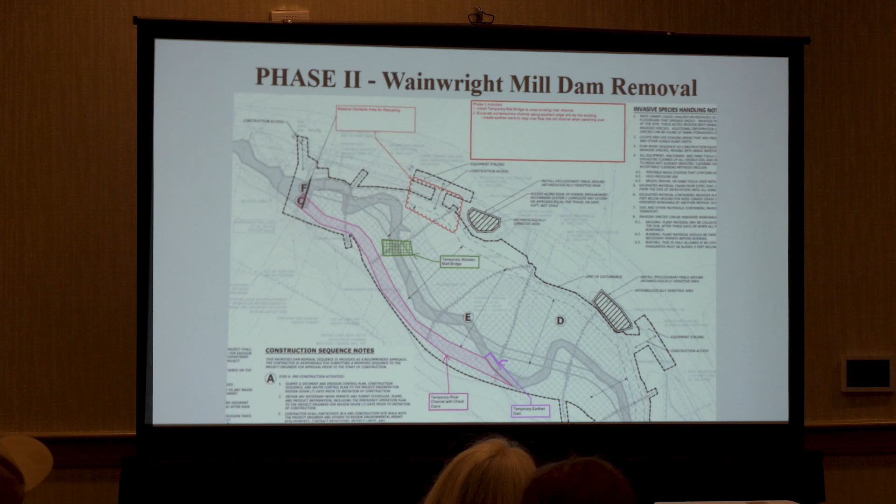and kind of do this project in a couple different phases where we were to move the river into a temporary channel along the southern edge, allowing us to work mostly in a drier working area and limit the amount of discharge to a couple little surges, which were unavoidable either way.

We did end up putting, I showed some pictures, Jessica showed, our check dams that we had planned to just progressively maintain throughout the project. Yep, there's our excavated area for phase 1.

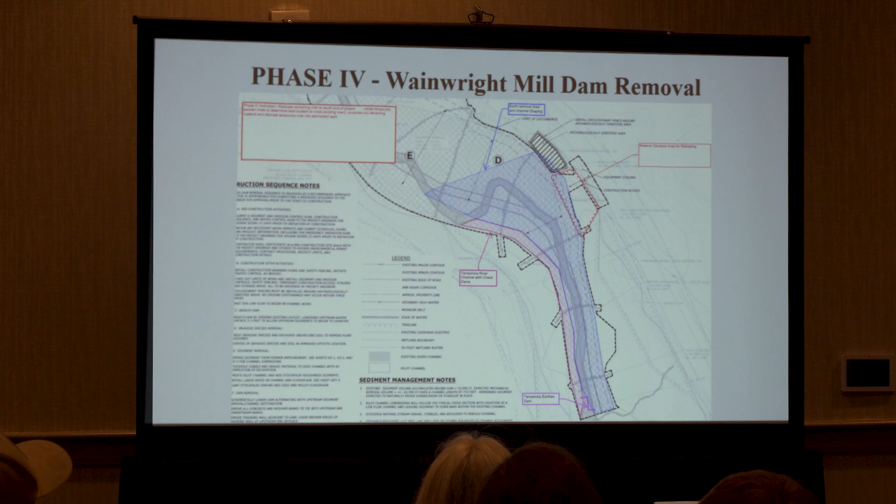That's nice. And yeah, in general, our original thought was to basically do that again in the second half of the project, working our way out and restoring the project as we go, because that made the most sense to stabilize the site. We start the project, and my whole plans don't matter, but we stayed in communication, which was good. John is here, he's the one that did the job.

What ended up happening is, I didn't show it on this one, but we created our access points, and incrementally, in more detail, explained how we took out the dam. And it wasn't tear it down to get the water level down. We left it in phases and kind of used that as a barrier as well for sediment.

As John went through, we realized that the soils were pretty wet. We created a crossing point, which I didn't show in the last one, was part of the plan. The intent, once John got going, was to basically keep the river where it is as long as we possibly could, and create our excavation to final restoration right up to the existing channel. That seemed to work a lot better.

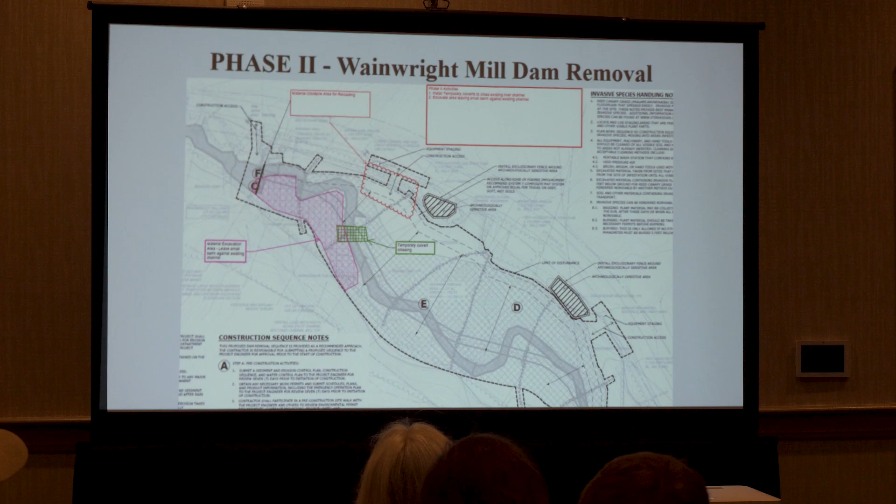As we got going with this somewhat altered plan, we did have an on-site meeting to discuss it with SLR. I think Jaron was there, and a few others. I just can't remember, Jessica, I don't know. But anyways, the important thing was, I think that we communicated that this is gonna somewhat alter the original plan.

And as long as we were all on board, we all agreed that now that we see how the material's coming out, and that once we excavated the material, there was no way we were getting back out there, that this made the most sense.

And then once we finished that, we took out the rest of the river, and naturally, as we opened up the stream upland, the river kind of followed its own path. And it seemed to work good, and we did do it in smaller phases too, so it ended up being broken up into like 3 phases versus 2 in general.

This is a big invasive species area, which we learned a lot, because yes, you have to go down more than the 2 to 3 feet. In hindsight, we would have just taken it all down to final elevation and considered the whole excavated material part of the invasive species area. But again, this was the most challenging in sediment control because it was the biggest area of the project.

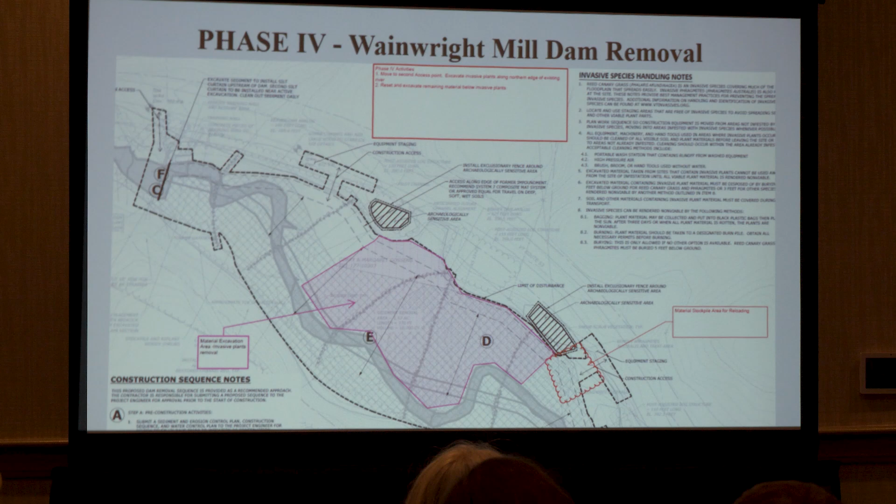Especially once we stripped all of what we thought was Phragmites down, and then we had to go back into the area and go down another foot on average, which looking back, we would have altered and gone down the whole distance. But we were in communication. We tried our best to follow up through stabilizing the site as we worked our way out of there. And in general, we did have some luck on our side that it was a very dry August and September.

Okay, I got the notice.

And then we finally finished the project, back to somewhat our original plan where we crossed the river, and due to permit restrictions where we had to be out of the river in our final week, in the pink area, we went across the river, did everything and just bailed it onto the other side so that we eliminated having to cross the river and in-stream work. So where the blue is, we finished out-of-stream work in probably the first week of October.

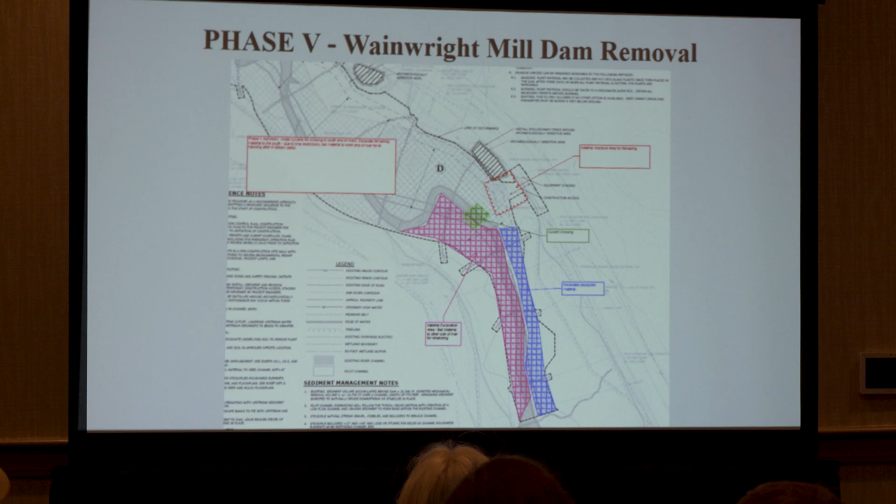But planning that out and communicating it, I think everybody was on the same page and understood the circumstances. And the final phase was to take that out. But in doing all this, we were constantly repairing check dams, cleaning them out, replacing them, incrementally taking out the old concrete dam, and trying to limit messing with the existing stream channel, waiting till our final grades were met to finally put it where it should be. And there it is, once it finally got back into place.

So, did I touch on everything, Josh? Yeah. Okay. Did you want to say anything on that? No. Now, how much time do we have? I had the 5-minute thing. Okay. 4 minutes.

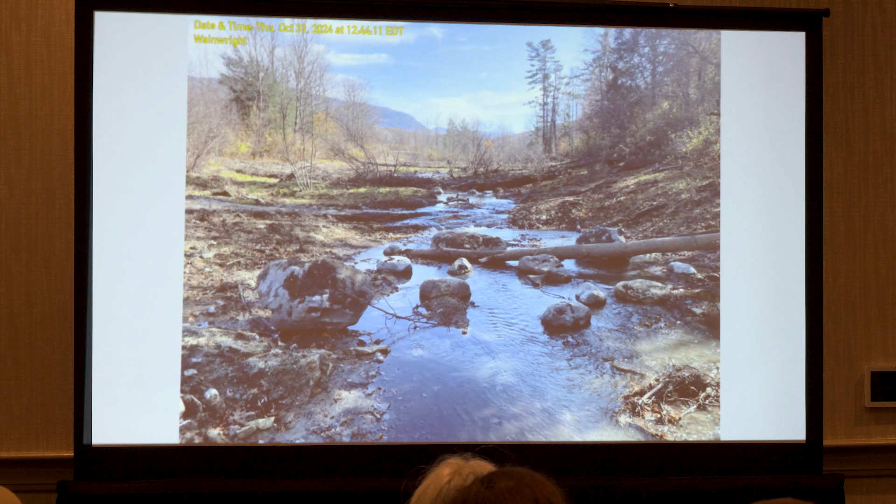Well, I just wanted to point out one unique feature on this: the use of the PALs or BDAs, and they actually chopped down a couple of the white pines to fall into the floodplain to help with filtering. So even after this project was complete, there are structures in place to also help manage sediment as it reestablishes itself. And to stabilize things so more sediment didn't impede our construction.

As you can see, we really tried to focus on replanting some of the shrubs that were on site. We would take those off, set them aside, dig out a section, sometimes 20 feet or more, and then take those shrubs and put them right back in, replanted probably within a 2-day range. A lot of red osier dogwood.